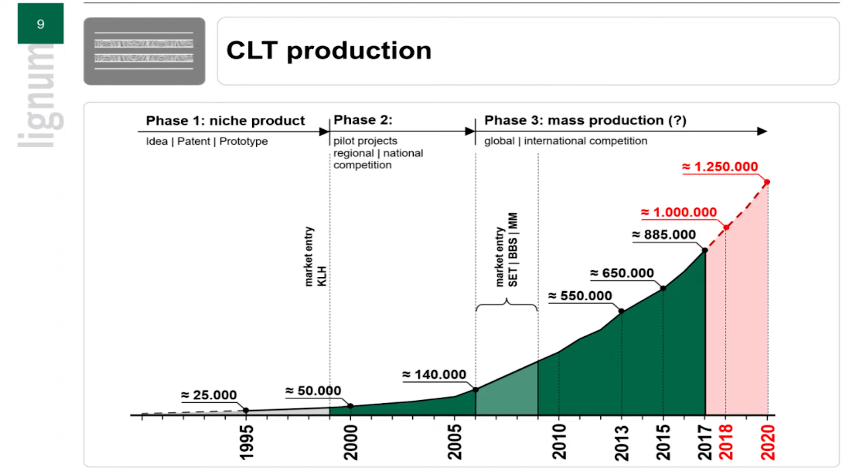So in 1995, the total potential production was about 25,000 cubic meters per year. 10 years later it was about 140,000. 10 years later, 2015, it was about 650,000 cubic meters per year. Then, in the past 5 years, the production almost doubled. Because now, in 2021, I'm waiting for a new version of the diagram, but they are already talking about 1.4, 1.45 million cubic meters per year.

There are new CLT factories in the US, in Canada, in Russia, in Australia, New Zealand. So the market is really growing very fast when we talk about CLT. This shows that the timber industry thinks that CLT can be the future of our buildings. We're talking more and more about sustainability, so in my opinion this really shows how timber can help us to solve the problems.

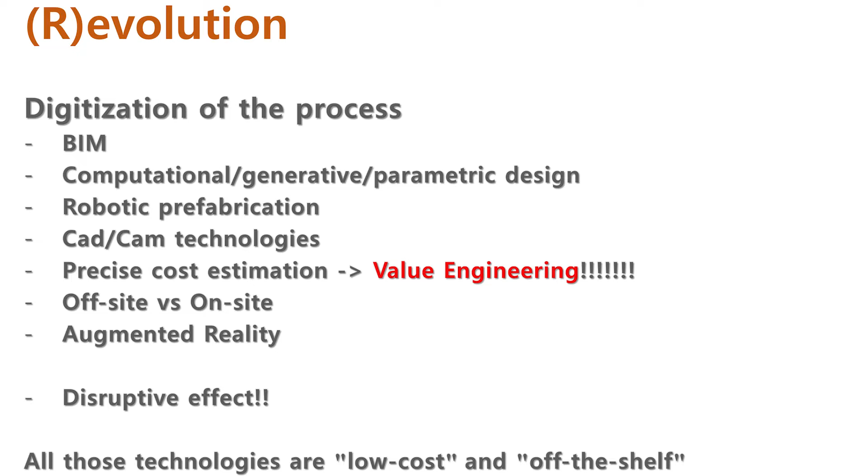As I said, in the past 17, 18 years, I think there was not only an evolution of the market, but we saw a revolution of the market. There was a digitization of the whole process. Now it's very common to use technologies like BIM, computational design, generative design, robotic prefabrication. We saw something beautiful; Sejai presented something very beautiful about prefabrication.

We can also estimate the cost of a structure in a very precise way. And this allows us to make a very important process, which is value engineering, the stage of the project during which we can reduce the cost, optimize the material, and combine different technologies. Personally, I'm a big fan of hybrid structures, which combine timber, concrete, steel. In my opinion, we need to get the most out of each material, to use the right material in the right position.

We also experimented, and I will show you later a couple of movies, how augmented reality can be used in timber, especially because everything is based on prefabrication, is based on a digital model on the computer, and the digital model can be quite easily transformed to a file for the CNC machine.

To do this, we need to have a holistic approach. And to show you what I mean by a holistic approach to design, I like to use this movie I took with a very small drone. We need to raise our point of view, we need to have a global view of the project. We cannot stay just at 1 meter and think that we know everything about a building. We need to raise the point of view.

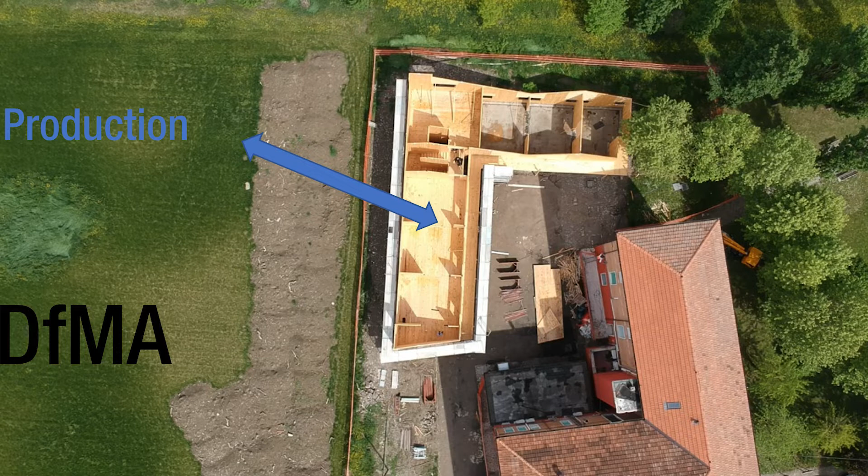What is missing here is the production. Where is the production? What do they do in the production? What do they do before you see this building? Just to give you an idea, to assemble those elements, it took about 1 week and a half. But before these 10 working days on site, there were months, weeks of meetings, discussions among designers, owners of the buildings, etc.

To better understand what production means and what the assembly on site means, we need to have a good idea of what DFMA stands for. It stands for Design for Manufacturing and Assembly. So timber engineering means to know what happens in the production.

How can we talk to the production? What do they need? What do they expect to get from us? What kind of drawings? What kind of files can we send them? What is possible to do and what is not possible to do? This is all part of the holistic approach and all part of the DFMA approach.

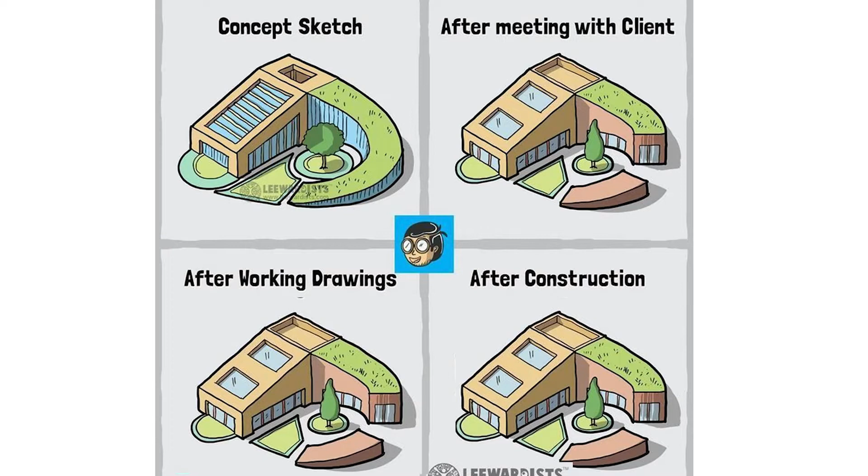This is the most frustrating part of our job as designers. We think to do something, the concept sketch, then we have the meeting with the client, but then on site, we see something completely different. I'm an engineer. I know there are many architects here, and we do not like to see this. We always want to prepare a drawing, and then to be sure that what we dreamed of will be on site. So why does it happen?

Sergey said before, what you see is what you get. There was this acronym on his slide, but I prefer to change it to what you draw is what you get. Now in 2021, but it was already 6-7 years ago, it is time to change this acronym to what you draw is what you get. Why do I say that?

Because if we use this approach, what you draw is what you get, we are sure that we prepare the concept sketch, we have the meeting with the client, and then we will have on site exactly what we wanted to have. It is nothing impossible. Of course, what I'm saying is about the structural elements. I cannot say about the finishings, about other things, but structurally speaking, we can be 100% sure that we will receive on site what was on our screen.

It is exactly what happens with a 3D printer. The only difference is that on 3D printers, we add materials. We start from scratch and we add new materials. With a CNC machine, with timber, we start from a bigger element and we remove the useless parts of the element. But all the process is always based on digitization, and it is the workflow we use, and I always suggest the other designers use it too.

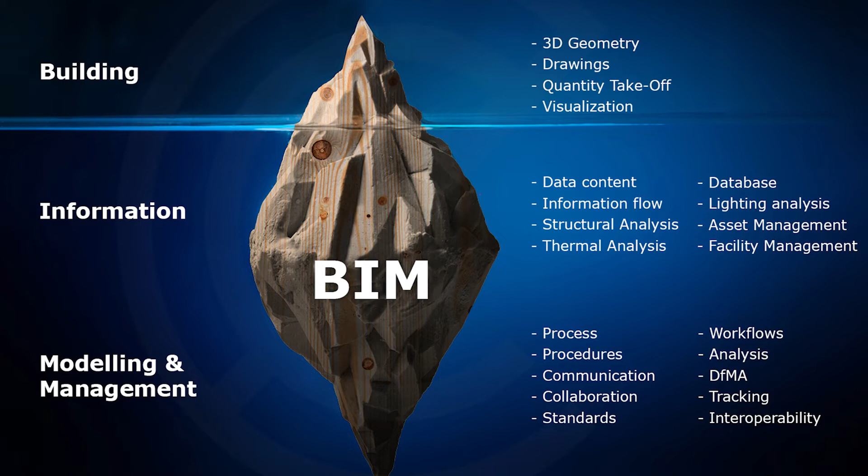The workflow is based on BIM technology, where we have all the drawings, we have the building, we have the information, and we can manage every single part of the project. A lot of people are talking about the digital twin when they talk about smart cities. They say, we are happy to tell the world that we created the digital twin of the city. In the timber industry, it is nothing new. We've been using digital twin models for years.

This means that we can share an IFC model with the client, with the architect. They can open the IFC model using Revit, ArchiCAD, Allplan, BIM Vision.

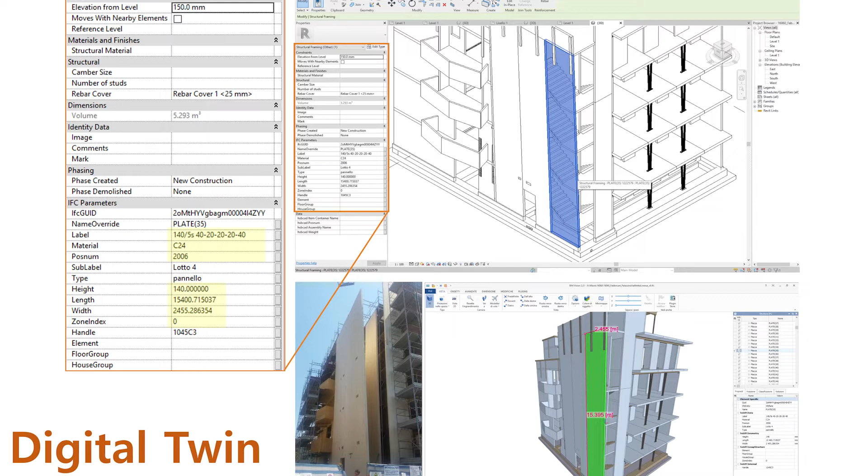There are many free IFC viewers, and you can click on an element and you see all the information related to that element. This means that if you click on the wall, the one highlighted in blue, you do not see just that it is a rectangle, that's it.

You see that it is a CLT panel, it is 140 millimeters thick, 15 meters long and 2.45 meters wide. It can also tell you the weight of the element, you will see later, but you have all the information, 100% of the information is there on your screen, and then you are 100% sure that you will get that element on site exactly as it was in the IFC model. And this can happen 4, 6, 8 weeks before the assembly on site.

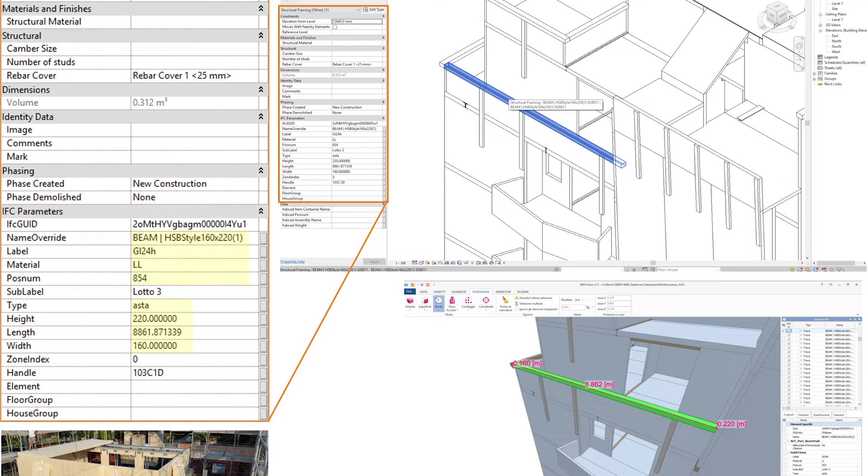No surprises on site. When I go to the site, mainly it's because I like to see how they work, I like to learn something new from the assemblers, but not to check if they are working in the right way. This can happen for walls, for beams, for connections. This is a building; I'm going to show you something more about this building later.

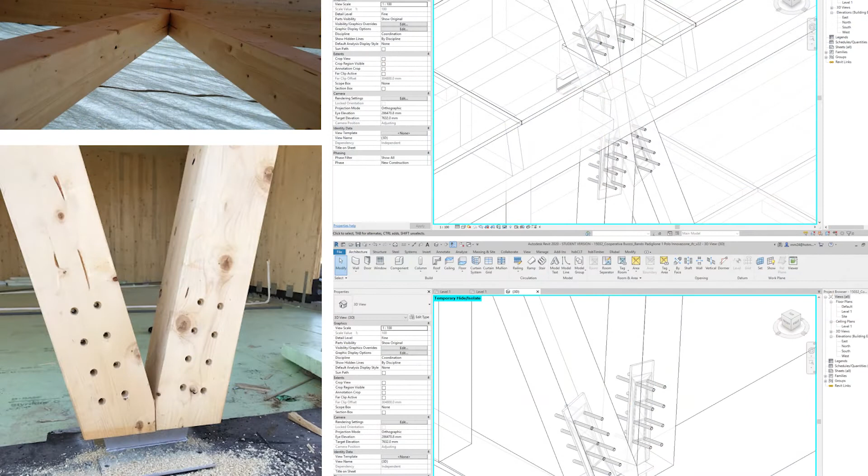For the connections, we saw before beautiful connections made in Japan. Here we use steel. There are some problems because of the building codes to use pure timber connections. And here the client was able to check how the connection will look on site: how many dowels, how big the steel plate, how it looks after.

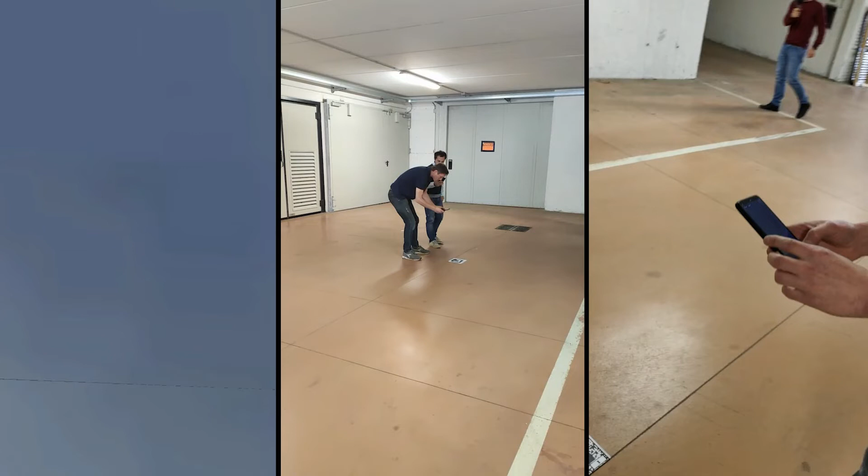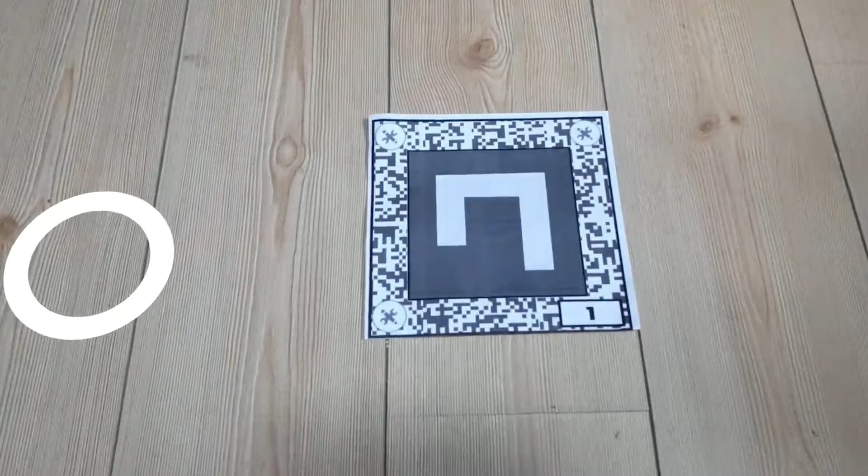When I was talking about augmented reality, I was talking about this. We implemented this technology quite recently, during the summer. It was a long process; we worked for more than 1 year, 1.5 years. But this gives us the possibility to check the connection; this is a scale 1-to-1 connection. We're talking about a 1.5 meter deep beam. And we're going to implement this model in the HoloLens in the next few months.

But we can check not only the connections, we can also analyze the structure and combine it with the results from the FEM software. So we can explore the digital model to see where we have concentrations of stresses, where we could have problems, where and why we should increase the size of some elements. These are new technologies that can be quite easily implemented, and since what you're looking at is a digital twin of the building we will have on site, it gives us the possibility to check every single part of the project, every single element, every single connection.

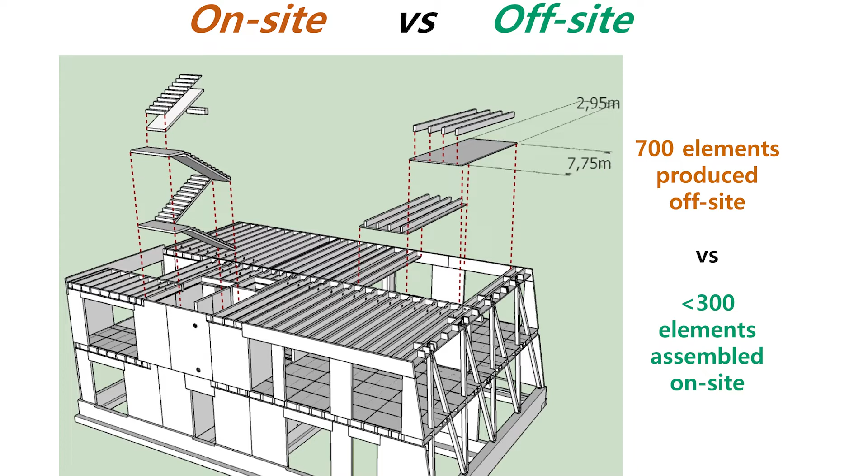So we can do this. Value engineering, thanks to these technologies, allows us to use what they sometimes call marginal gains, to reduce the cost, to make timber the most cost-effective material. And in this case, we compared on-site versus off-site. For this building, the company produced more than 700 elements. They pre-assembled some of them, so on site they assembled less than 300 elements.

If you look at the upper left corner, you see a stair. There is a ramp made of CLT, and then all the steps are made of glulam. We're talking about 15, 16 elements pre-assembled together off-site, and then on site it is one single element. So it takes 20, 30 minutes for the assembly, more or less. In this way, we reduced a lot the time on site and consequently the cost for the assemblers.

And this is another very recent example the company is going to assemble. This is a 6-story timber building in an Italian city, Parma. We compared 2 different levels of optimization of the walls. On the left, we divided the walls into vertical elements, so we have 234 elements.

But on the right side, we tried to reduce as much as possible the number of elements on site. So now we are talking about 192 elements. The surface is exactly the same, 348 square meters, but we have 42 fewer elements.

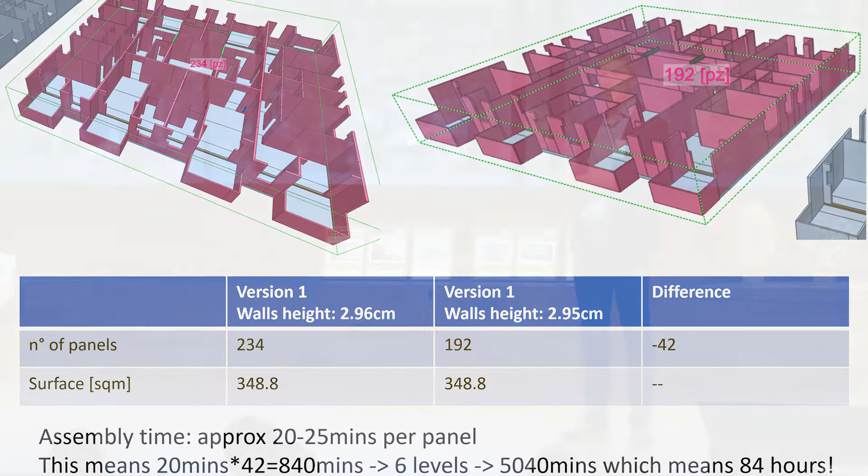If you multiply by 6 levels, every element you need to consider takes about 20-25 minutes to be assembled on site. So if we multiply 20 minutes by 42, that means 840 minutes, multiplied by 6 levels, we're talking about 5,000 minutes of extra time. So just working on the optimization, just working on reducing the number of elements, we can reduce the assembly time by approximately 5,000 minutes.

This is an operation which is very important because in many cases companies use this as a basic unit to quote a price for the CLT. How many square meters are we talking about? Okay, 10 euros per square meter for the assembly. But what about if you have 192 elements or 234 elements? The difference is big. Every minute means that you have at least 3 assemblers plus 1 crane. Multiplied by 5,000 minutes, it's a lot of time, a lot of money. Time is always money on site.

So the software we are using is like an ecosystem of software. This is nothing impossible. We are not talking about coding, about creating new software. We are more talking about integrating many software and getting the most out of each of them. You surely recognize some icons, and you associate the icon to the product. For freeform elements, we are basically using Rhino and Grasshopper to create the algorithms and then to create the files for the CNC machine at the very end of the process.

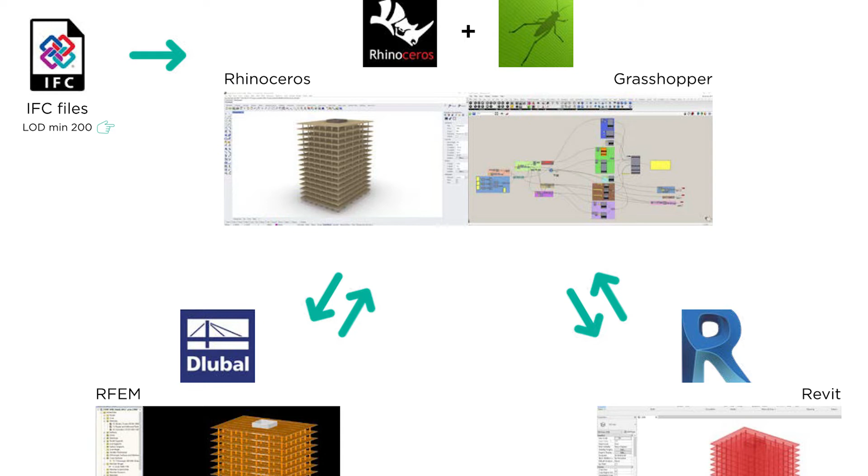So, said that, look at the time, I'm good.

I'm showing you a few projects we worked on in the past years. This is a 6-story timber building. We are in Modena. In this area, we had a pretty strong earthquake in 2012, so people in that area now are more keen to live in a timber building. Generally in Italy we are very conservative. In some areas they are very focused on having buildings made of stone, concrete. So timber is not a very widely used material yet. Approximately 5.5 to 6.5% of the new buildings in Italy are made of timber. So we're not talking about huge numbers.

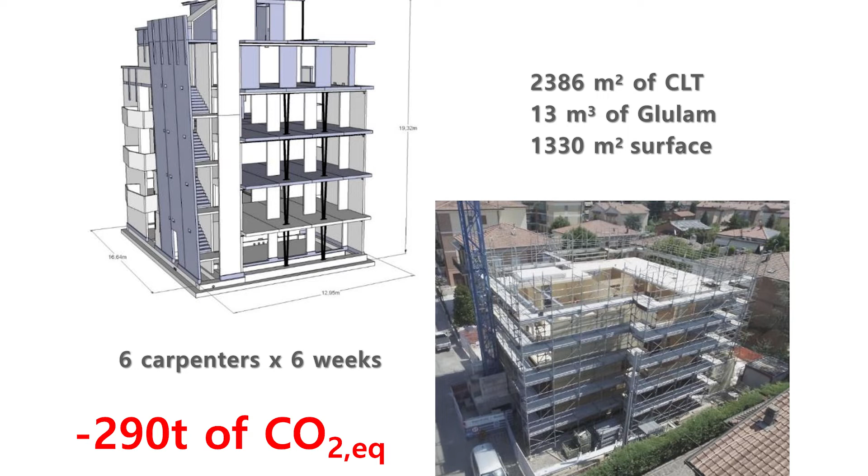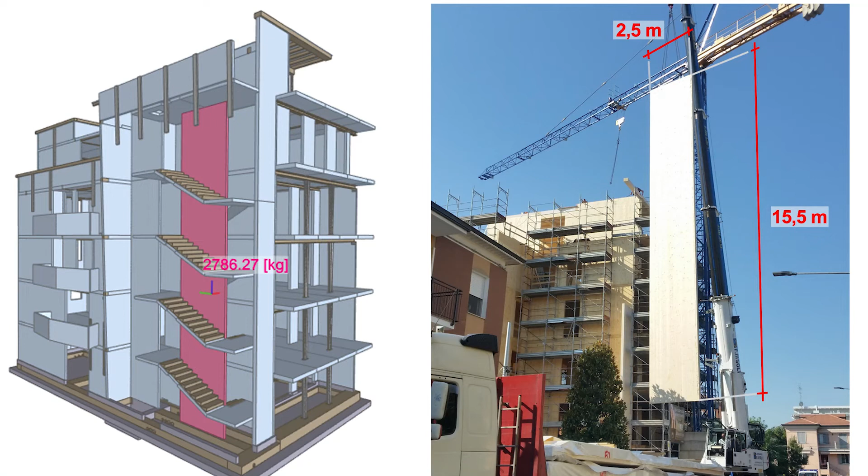But in this case, the client, the developer, decided to go for timber. We're talking about a 6-story building, and 6 carpenters, 6 assemblers, took just 6 weeks to assemble the whole timber structure. 1 floor per week. And we have about 2,400 square meters of CLT, not so much glulam, and a living surface of 1,300 square meters. The biggest challenge for this building was to find a producer that can produce and transport these huge CLT panels, 2.5 by 15.5 meters. And you see here the digital twin on the left, approximately 2.8 tons.

So instead of renting a huge crane for 6 weeks, we decided to go for a smaller crane and to have a bigger crane for just 8 hours the day they had to install those elements. Those elements are the ones for the staircase. Probably it was 11, 12 hours, but they completed the assembly of the whole staircase of a 6-story building in just 1 day. And here you see the stairs.

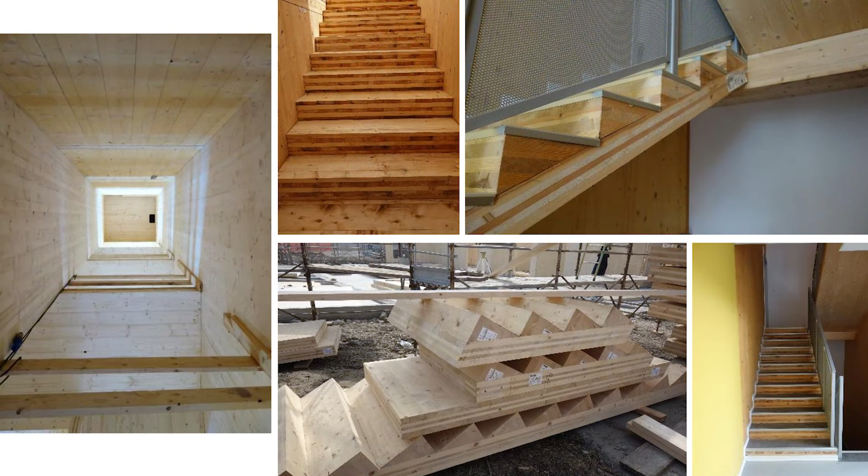It's a very smart way to reuse the waste material, to reduce the percentage of waste material on site, and again to reduce the cost. You don't have to go on site anymore as a designer to draw the stair on the wall. You just receive the prefabricated elements, that's it. They installed one ramp in 20 minutes, another one in 20 minutes, the third one. So it is absolutely very, very fast. And precise at the same time, of course.

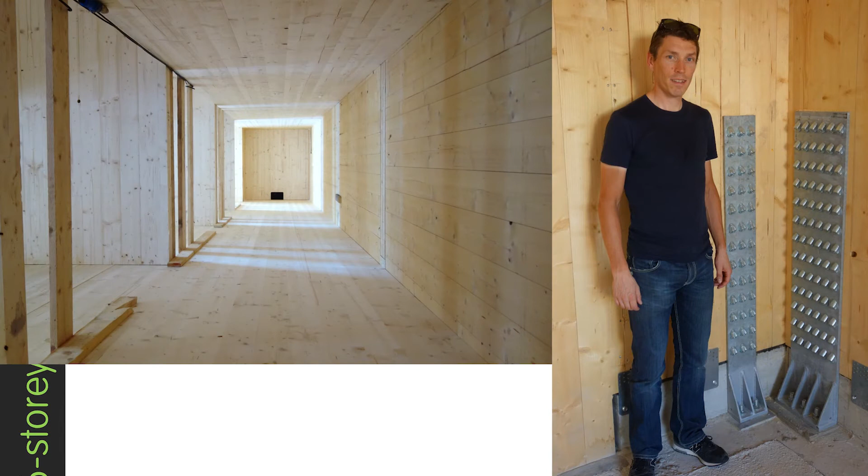On the left is the elevator shaft, completely made of timber, and on the right side it's me in front of the steel connections. We had to design custom steel connections to prevent the uplift of the building. They are about 1.60 meters, more or less. And of course, a lot of screws.

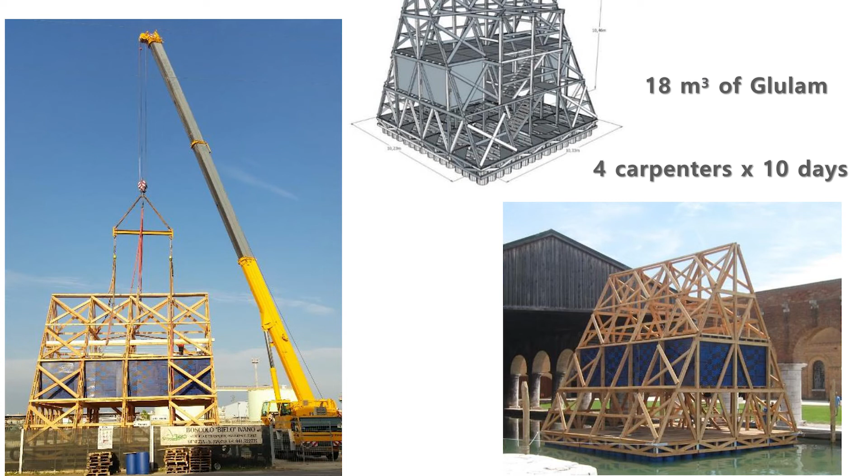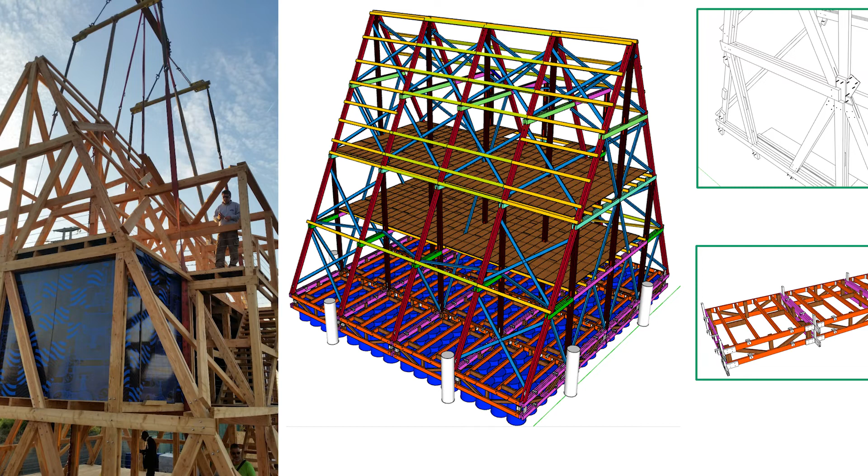This is a floating structure. I was amazed yesterday when I visited in Rotterdam the building that was awarded the day before. We engineered this for the Biennale of Architecture in Venice in 2016. We had just 6 weeks to engineer the pavilion, find a producer, find a team of assemblers, and find a way to assemble the building on the mainland and then transport it to Venice on a barge.

So you see here some details and some more drawings of the connections. This is another, well, one second. I'll show you a bit more of the connections we decided to have for this building.

And again, this was digital model, digital twin. It was exactly as it was on our screen. No surprises, no unexpected events, no chainsaw to use on site to correct the shape of the element.

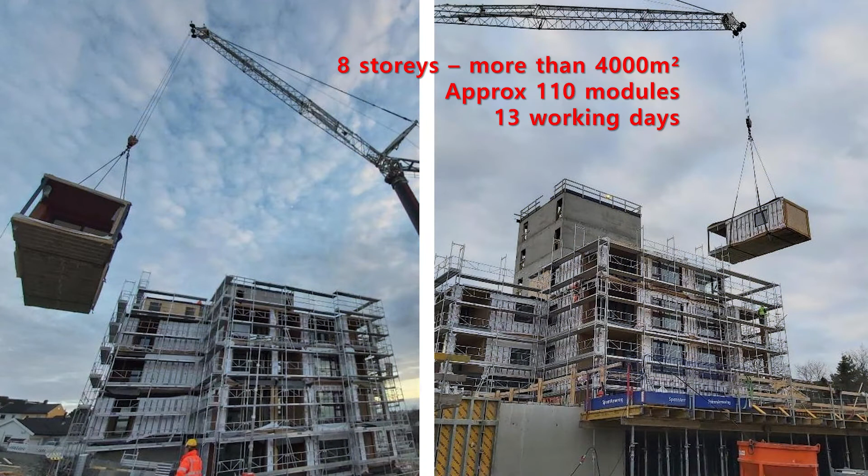And we had a very, very, very low budget. At the beginning of the first meeting we had with the owner, we said, no way, we can't make it. The cost is too low. You need to add at least 20%. Then he said, no, please, I want to have a timber building. Please find ways to reduce the cost.

Another project is this one, a volumetric modular building. It is located in Trondheim, in Norway. And we engineered a complex of 4 condos in total. These are the tallest hybrid volumetric modular buildings, they said, because we have a central core made of concrete, which is 10 by 10 meters, and then around they used volumetric modules with a structure purely made of timber, as you will see in a few seconds in an animation.

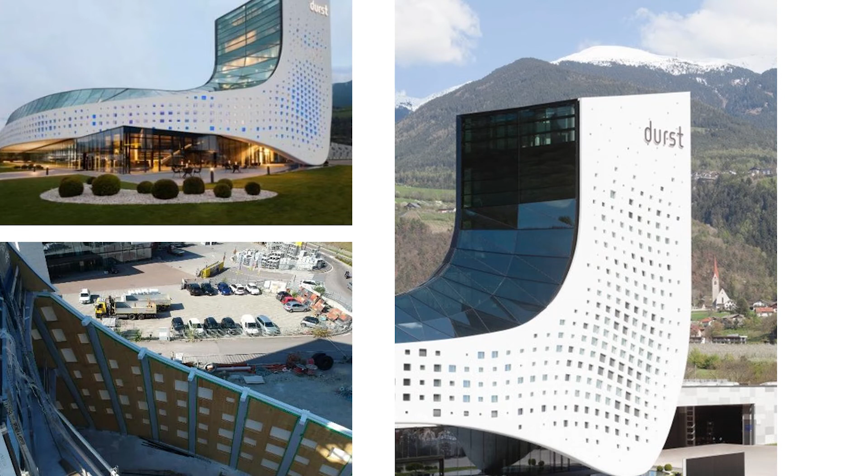Because all the openings have a specific meaning, it's like a pixel effect. They can change the color of each window, so they can change the color of the facade or have the flag of the country the visitors come from. So they wanted to have exactly this effect, and we had a few meetings, and CLT proved to be the best material in this case.

We used IFC format to exchange the files, but there was 1 team for concrete, 1 team for steel, and 1 team for timber. And it worked very well. All the files were on a cloud system, and everyone could take the file, import it into his model, check if everything was okay, and then create the files for the CNC machine.